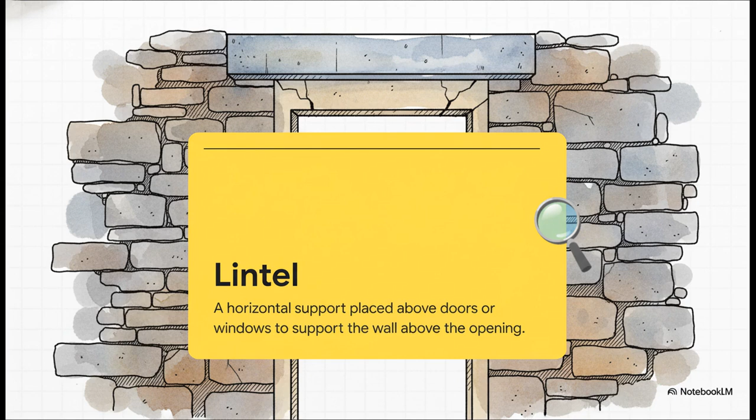Okay, first up, the lintel. Think of it like a strong shoulder that carries the weight of the wall directly over an opening. Without it, the wall above your front door would just crack and collapse. So the big takeaway is this: if you see a door or a window, you can bet there's a lintel hiding just above it, doing some serious heavy lifting. Now let's talk about its bigger cousin, the beam.

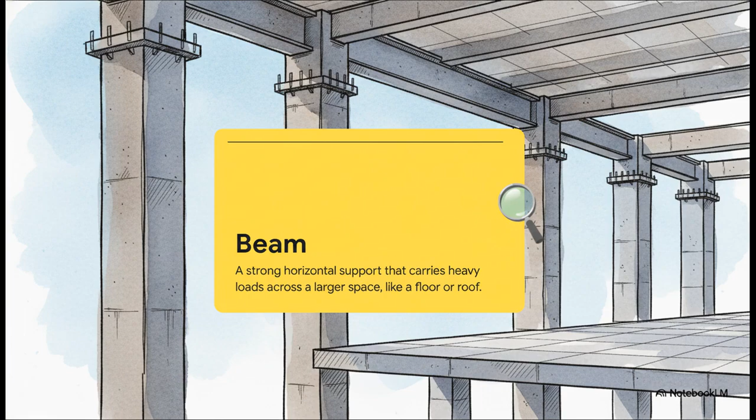A beam is also a horizontal support, sure, but it works on a much, much larger scale. It's designed to carry massive loads. We're talking an entire floor or even a roof across a really wide space, and then transfer all that weight over to columns or walls.

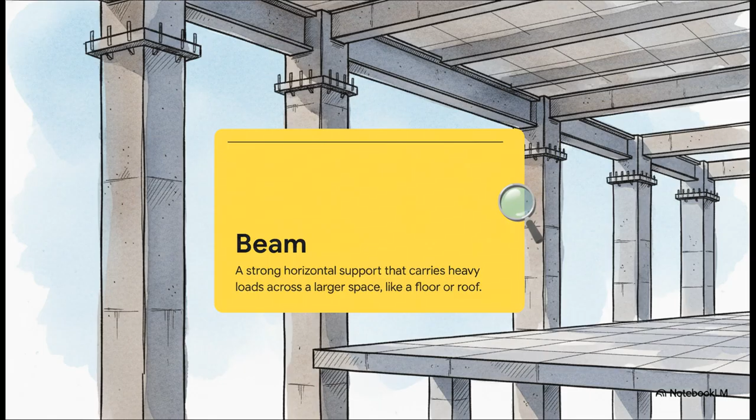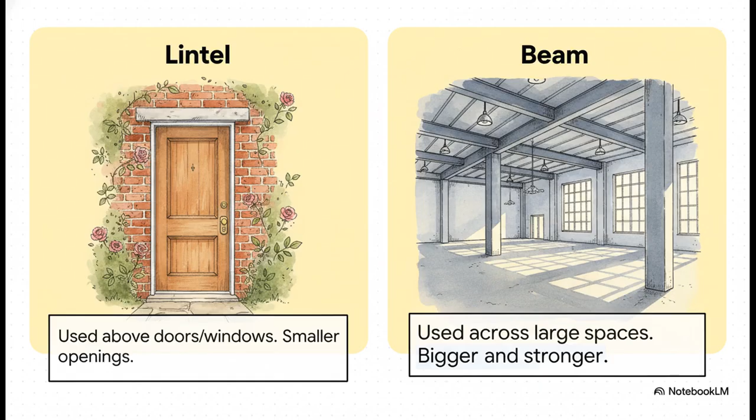Simple as that. Okay, so we know what they are, but how in the world are they actually made? It's not just about slapping down a slab of concrete. It's this precise, multi-step process that ensures everything is strong and safe. Let's walk through how it's built, step by step. Now what's really cool here is how each step builds on the last one.

You start with super precise measurements. Then you build a mold, the formwork. And here is the secret sauce: you place steel bars inside.

Why? Well, concrete is incredibly strong when you squeeze it, that's called compression, but it's surprisingly weak if you try to pull it apart. And steel? It's the exact opposite, it's a champion against tension. You put them together, and you get this amazing super material.

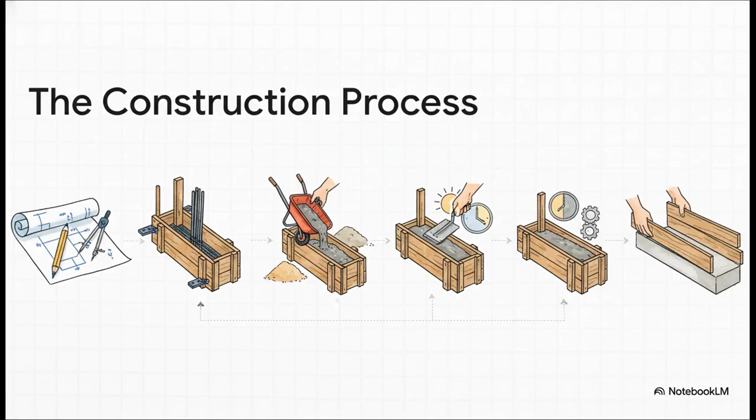After that, you pour the concrete, level it all out, and then comes maybe the most crucial step of all. You just wait. You have to let it cure and gain its full strength before you carefully remove that mold. And listen, doing it right is everything.

Building these supports isn't just about following steps. It's about meeting really high standards. The difference between a great job and a costly mistake can be just a few millimeters or a single poorly mixed batch of concrete. So what does a perfect job actually look like?

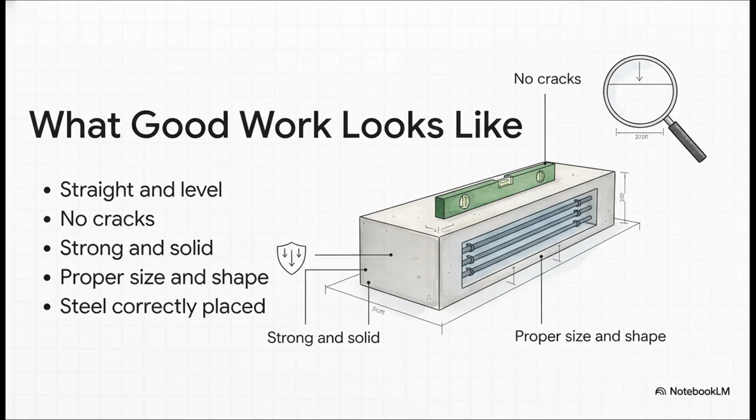This, right here, this is your quality checklist. A well-made lintel or beam is perfectly straight and level. There are absolutely no cracks, and it feels completely solid. And just like this slide shows, the size, the shape, and where that steel is placed inside, it all has to be exactly as designed to handle its specific load.

And on the flip side, these are the big critical errors you have to avoid. Wrong measurements? Well, it either won't fit or, even worse, it won't support the load correctly. A poor concrete mix means it'll be brittle and weak.

Not letting it cure long enough? Yeah, that's like taking a cake out of the oven way too early. It's just going to crumble under pressure. And weak formwork is a total disaster waiting to happen. The mold could literally break during the pour, ruining the whole thing.

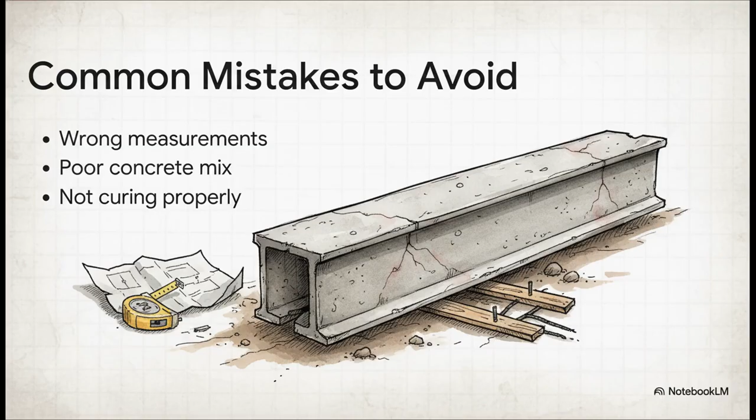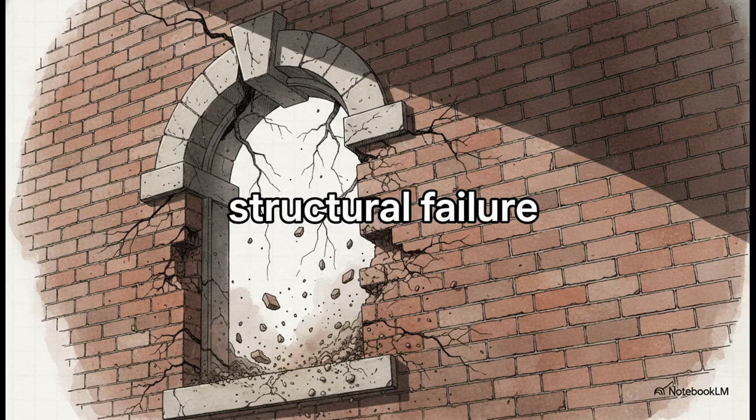And let's be really clear about this. These are not minor errors. Any one of these mistakes can lead to structural failure. And that means cracks, collapses, and extremely dangerous situations. This is exactly why the standards are so incredibly high.

Okay, we've covered a lot. So to help you remember the absolute essentials, I've got a super simple trick for you. It's a great little way to lock in these key concepts for good. Just remember LBSC. L is for lintel, the one over a door. B is for beam, that big, beefy support. S is for the steel inside that gives it its real strength. And C is for the concrete that holds it all together.

So the next time you walk through a doorway, you'll know all about the invisible force keeping you safe. And it makes you wonder, what other unseen structures are holding our world together?